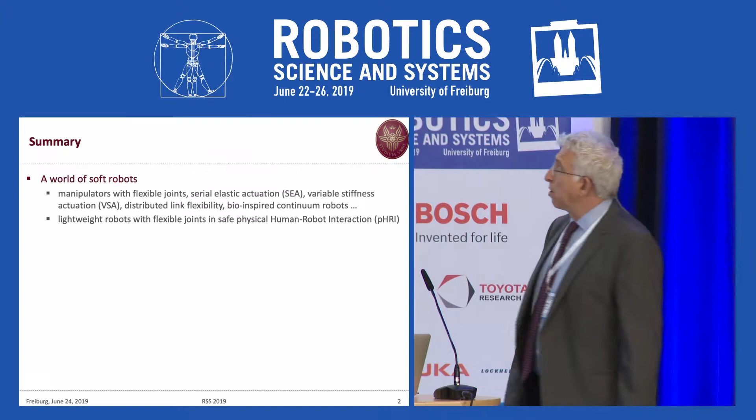So, control of soft joint robots with some application to safe physical human-robot interaction. So the outline of my talk will be just discussing what are the classes of soft robots that are around. There are many names. Sometimes things are equivalent, sometimes they are different structurally from the control point of view. I will show why we have used and we are using lightweight robots with flexible joints to do the best that we can for physical human-robot interaction.

And then I will present some easy modeling stuff on a particular class of soft robots, those that have flexibility concentrated in the joints or in the transmission. And for this class, I will just outline what is the classic theory of control for solving the conventional task that every robot should do, namely going to a certain configuration, so a regulation task under gravity or without gravity, or following a trajectory defined in the Cartesian, in the task, in the joint space, whatever. So, and for doing this, I will use the classical tools.

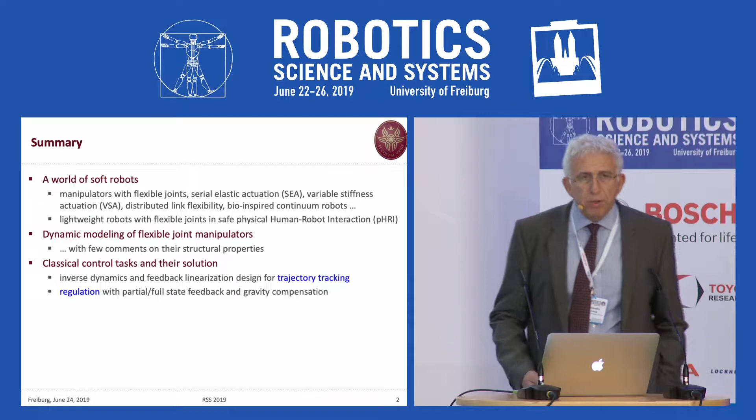Why I'm introducing this? Because the second part of the talk will be revisiting all these things for the whole class of soft robots, including also those with joint elasticity. So we notice that there is a kind of a contradiction in how we have handled for years, for decades, flexibility in these systems. And so there are new ideas coming on, and I will present my own ideas and also some of our colleagues going through, if time allows, 4 examples of this type of new idea.

Which is essentially, I recollect it, although my colleagues don't call it like this, as the use of feedback equivalence. So it's an attempt of merging, for those of you who are familiar with this topic, a pure model-based feedback linearization technique, like the one that we have heard before, so transformation through feedback of the dynamics of the system until we get a very nice controllable linear system that we can handle very easily.

So this was one avenue. The other avenue said, no, you have to deal with the dynamics of the physical system. You have to exploit passivity. In this way, you're robust. You are no longer affected by uncertainty in your model, which is not true even for the passivity case. So there were these two schools that fight for decades.

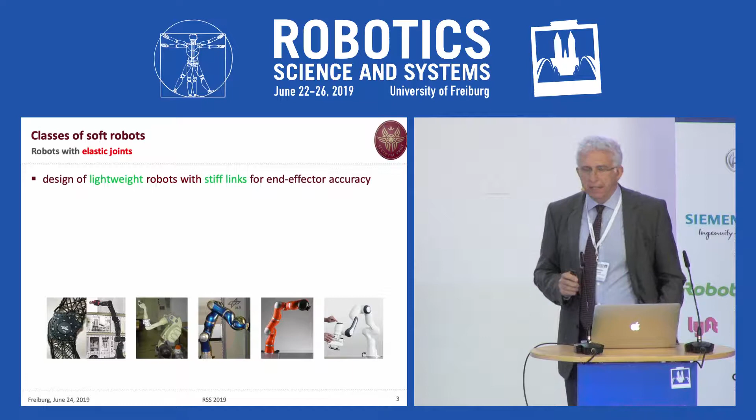First of all, robots with elastic joints, not flexible, elastic, because we assume that flexibility is in the linear domain. Why do we build this? In fact, sometimes we don't build this on purpose. We have to deal with the presence of flexibility in the transmission because we are using high gear ratio devices like harmonic drives, which introduce elasticity per se.

And this is a way of absorbing energy. In fact, no matter where you put some compliance in your structure, on the coverage of your links or in the transmission or on both sides, then you're allowed, for instance, to absorb impact, so to absorb energy.

In fact, in the case of elasticity at the joints, what you do is you decouple the inertia of the motors from the inertia of the links. So if you're able to build a system which has stiff links and joint elasticity, but lightweight link, then the heavier motors are detached from any effect of collision. So the robot will harm less whatever it hits, in particular humans around.

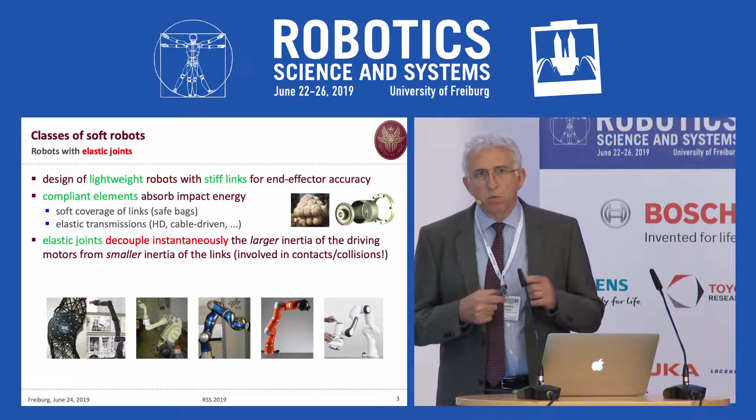And this was a main idea, probably the first idea for recovering the use of lightweight robots with joint elasticity in physical human-robot interaction. And of course, things do not come for free, so you have a more complex control problem. You need more sensors.

For instance, you may need a joint torque sensor or double the number of encoders at the joint, so one on the motor side, one on the link side, and so on.

But all these ideas have gathered into industrial products eventually by Kuka and by Franka Emika and so on, which are the so-called torque-controlled robots. Why are they torque-controlled? Because there is an internal loop which measures the transmitted torque across the elastic joints and then uses it for realizing the task independently of the presence of friction, and so on.

So there's another class that has been exploited, in particular also by Antonio very much in a European project, which is robots with variable stiffness actuation. In this class, you have for each joint, which is essentially flexible, but the flexibility can be modified online. So there's a second command, either in an agonistic-antagonistic mode or in a serial mode, that allows you to modify the actual stiffness of the joint, together with the fact that the joint moves and follows some trajectory.

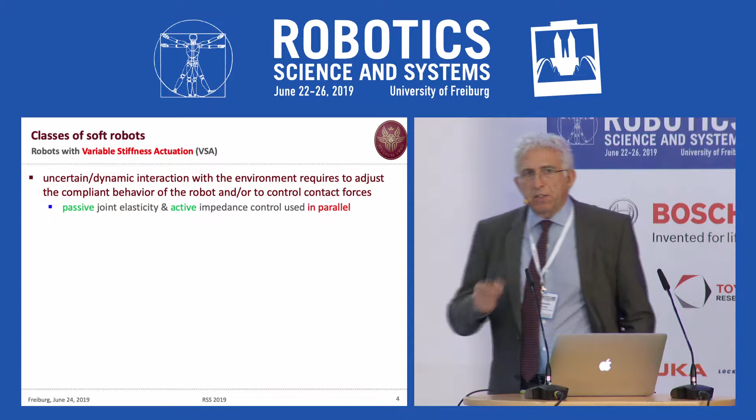So you have a two-output control problem that you can adapt online. So why is this situation good? Well, essentially because you're able in this way to preserve performance and handle safety. So if you have a very sloppy, soft robot, and it's light, you expect not to have many problems when it hits the environment, or in particular the human which is working nearby.

Okay, but the price you pay is that you're not as accurate as traditional industrial stiff robots are. So the idea of variable stiffness actuation is to modify it online to get performance when you need performance. For instance, when you're starting and you want to accelerate very fast, you need to stiffen your joints and then relax the compliance of the joints when you're reaching high velocity, where the danger of doing some damage to the environment or to the human is higher.

So there are other reasons why you can use variable stiffness actuation, and lately there have been also many other applications. The idea of storing energy and relaxing it in an impulsive way, so that you can throw a ball 10 times longer than with a conventional actuation with the same amount of power, and things like that, and robustness to environment problems.

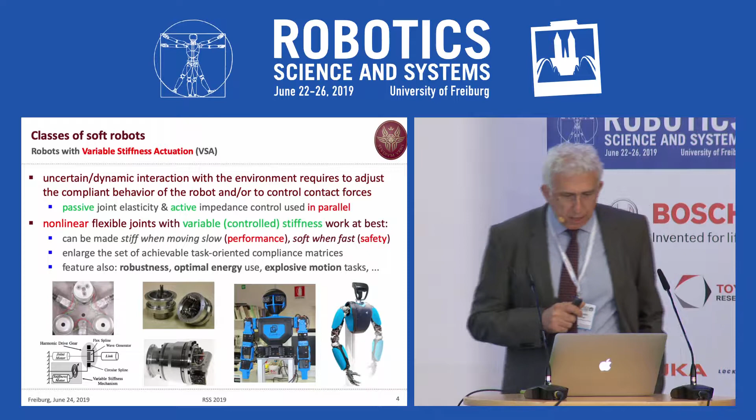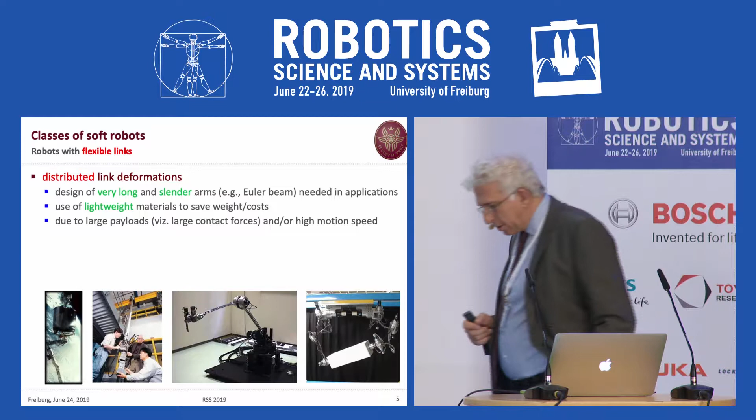Okay, so this is another thing. Then there's another class of soft robots, those in which flexibility is distributed along the links. Again, this is not really a choice in general. If you're familiar with the Space Shuttle manipulator system, this was a very long arm in space, so not subject to gravity, but needed to be teleoperated quite slowly, because otherwise, with its length and with its limited mass, but still quite heavy, it was going to oscillate and vibrate, and this is not good.

So you want to use lightweight material to save energy and cost, or you may have this situation of flexibility distributed along a link appearing in your operation because you're carrying heavy loads, and this is another situation. The situation is quite similar because in the presence of link flexibility distributed along the various limbs, then you will lose accuracy in position.

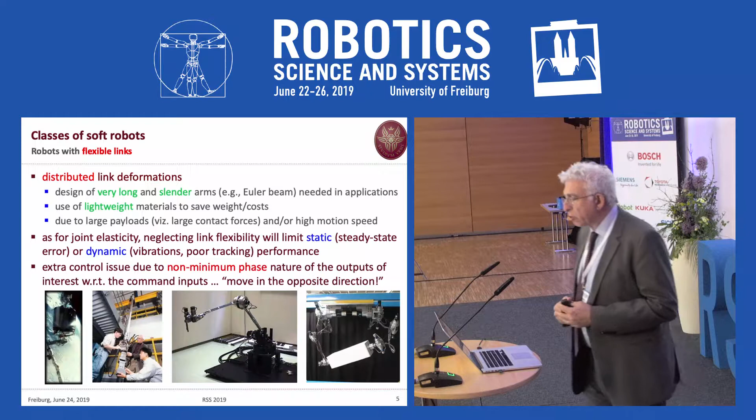So you have a static deflection due to gravity. But also, when you're doing a fast trajectory, you will tend to oscillate. So you have a control problem, just like in the case of joint elasticity and of variable stiffness actuation as well. Here there's another problem, however.

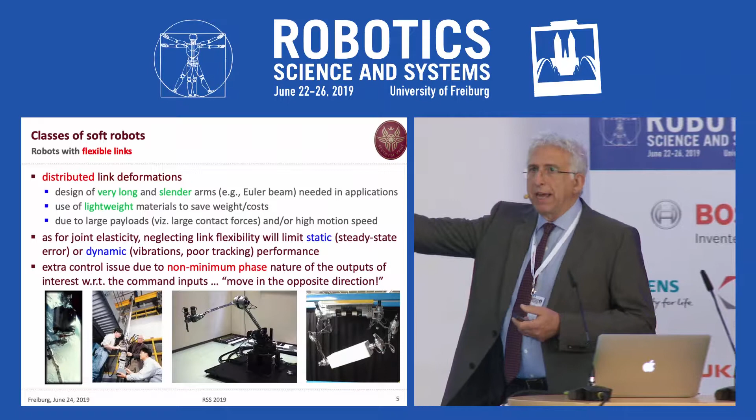The fact that from the control point of view, you have a sort of non-collocation of what you'd like to control and where you apply your command inputs. Typically, if you think of a long, slender, flexible link, like my arm, you apply torque at the base, but you want to control the tip motion.

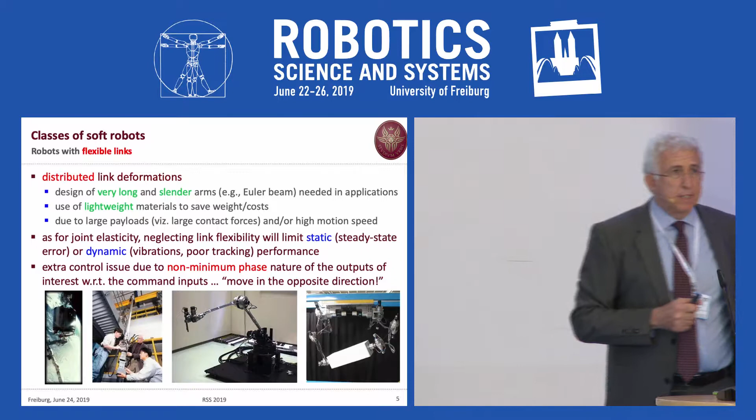And for those who are familiar with control theory, the linear transfer function that you can build upon is a non-minimum phase one. So it has zeros which have positive real parts. So you cannot do inverse dynamics in the conventional sense, because otherwise these zeros will become poles in the controller which are unstable, and you will have instability in the closed loop.

So this is an additional phenomenon that you can represent by saying these systems move in the opposite direction with respect to the command. So if you're giving a torque at the base, the acceleration at the tip will typically be in the opposite direction. And this is revealing the fact that the system is non-minimum phase.

Finally, continuum soft robots. I think this is a big, growing community. You are familiar with the fact that Soft Robotics as a journal has the highest impact factor in the field, which is, for me, kind of surprising, but not too much. Many of these systems are represented by an infinite number of degrees of freedom in principle, or they are hyper-redundant in terms of degrees of freedom.

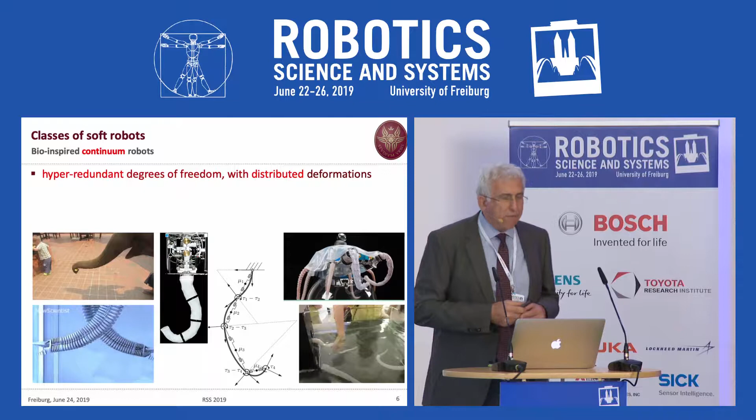And they have, again, distributed deformation. Here you can see a number of examples. One is biological, the other are bio-inspired. So this is another common technique. You see the famous octopus by Scuola Sant'Anna, and the elephant trunk by Ian Walker, one of the first to start this type of activity.

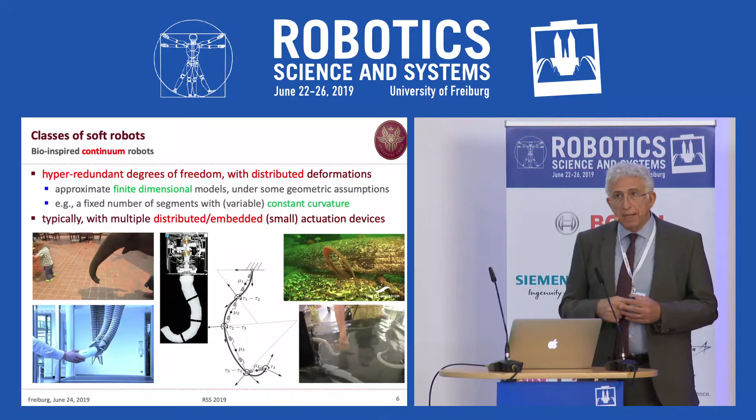And you have also an equivalent representation of this distributed flexibility in a continuum, where under certain assumptions, you can match this with a finite dimensional model.

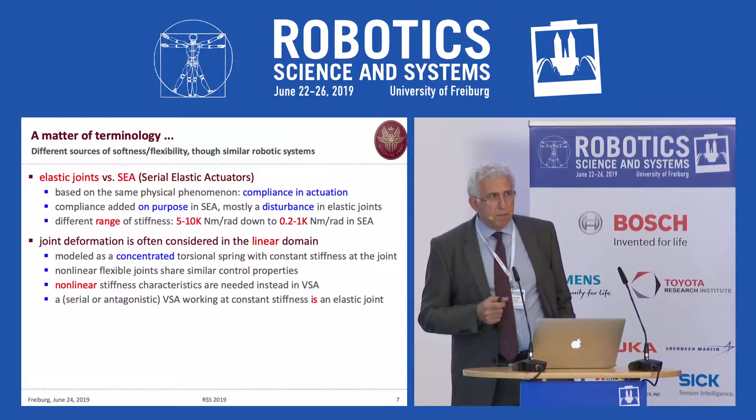So this is one comment. The second comment is that most of the time we consider flexibility in the linear domain, so we talk about elasticity, but many problems and many similar results hold also when you're dealing with nonlinear stiffness behavior.

And finally, as Antonio commented, this is, I think, a very interesting point. If you talk to control people, they say, okay, all those flexible systems of robots are under-actuated systems. Why? Because the number of generalized coordinates or degrees of freedom of the system is larger than the number of commands. So you cannot do whatever you wish, like in the case of a rigid robot. So trajectories should be feasible according to the model and things like that.

But this is not the whole story, because if you think about a simple mechanical system made by a number of masses connected by springs, with just one input on one side, and you're controlling the last mass in this series, well, it's not easy, but this is a linear controllable system, and you can do many things. So under-actuation is not the whole story, but under-actuation without the property of controllability in the first approximation, then the problem becomes very hard.

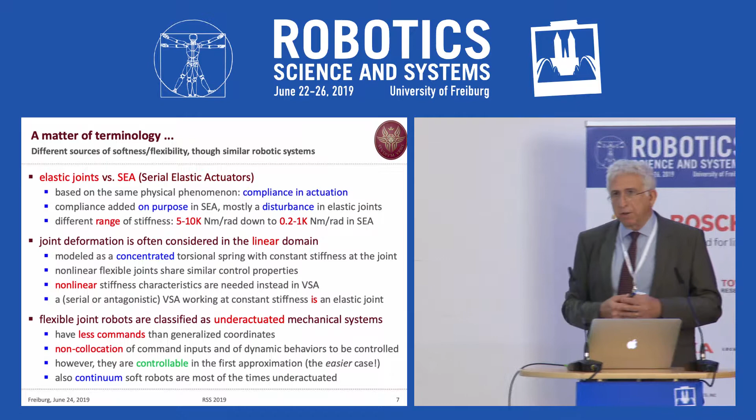And elasticity, at least in the joint elastic case, provides this linear controllability, and this is why also more complex nonlinear control design can be implemented.

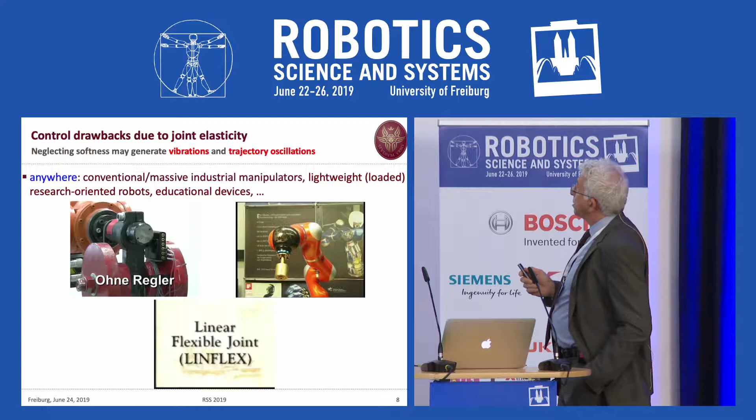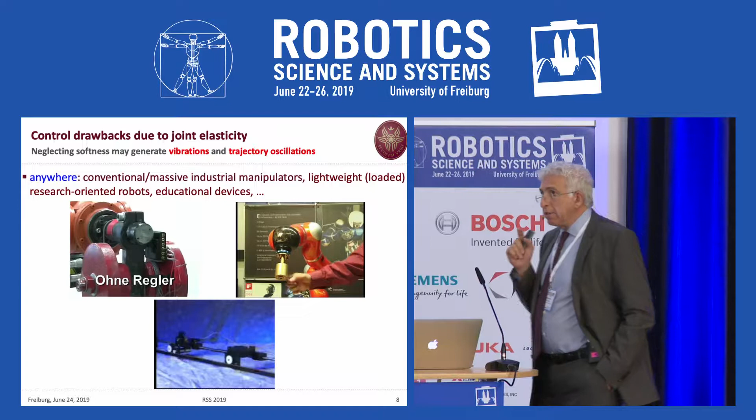In this video, I try to show the classical problem that you have in the presence of joint elasticity. You can see an industrial robot, a heavy one, a KUKA, and also the lightweight KUKA arm, actually the DLR, and then also an academic example by Quanser. In all these cases, on one side you have the motor, which is being held fixed or oscillating at a given frequency in the last case, and on the other side the link side of the elasticity, which vibrates because it's not controlled unless you model what is going on. When you model it, you can counteract with feed-forward or feedback strategies. This is just an introduction.

This is one, or only two videos in my lab, where we were using the lightweight KUKA arm to do physical human-robot interaction. We can do this in a very efficient way because we have a good model, and because of the presence of joint elasticity, which is able to decouple the effect between the links dynamics and the motor dynamics.

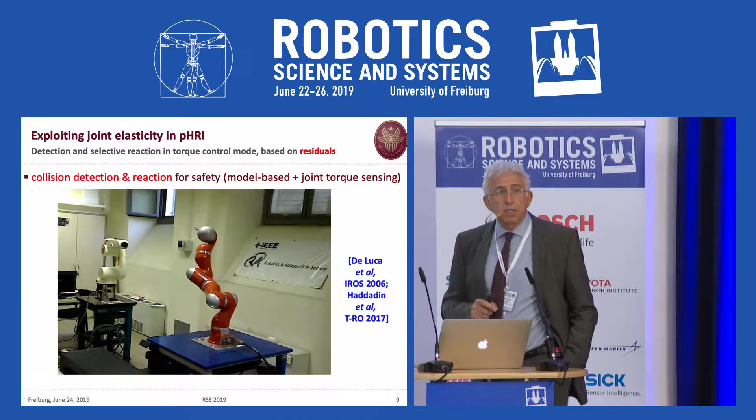In this case, without having a force-torque sensor and using the so-called residual, for those of you who know this type of work, we are able to detect collision at any place in the structure and also distinguish if it's a soft or a hard collision. If it's a hard collision, like in the first place, then the robot goes away. If it's soft, it engages a collaboration phase where forces are exchanged, and in fact they are measured and controlled. Here I show an ICRA 2015 result.

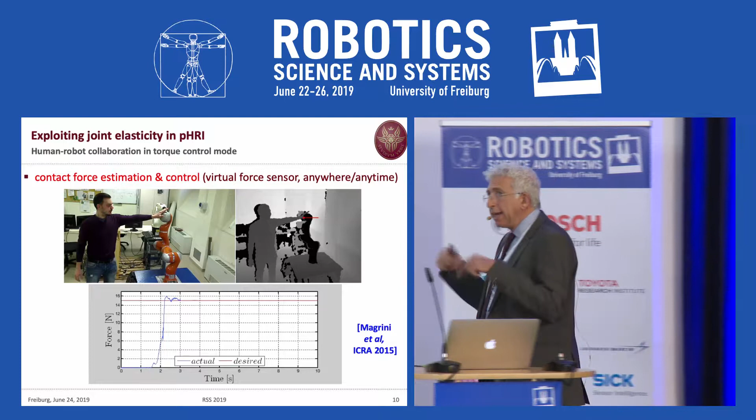Again, you can see a depth view of the robot, and also a red line, which is where we detect the contact based on external measurement, one or two Kinects, and internal model-based computation, which is the residual signal. When both of them tell us that something is going on, we localize the contact point.

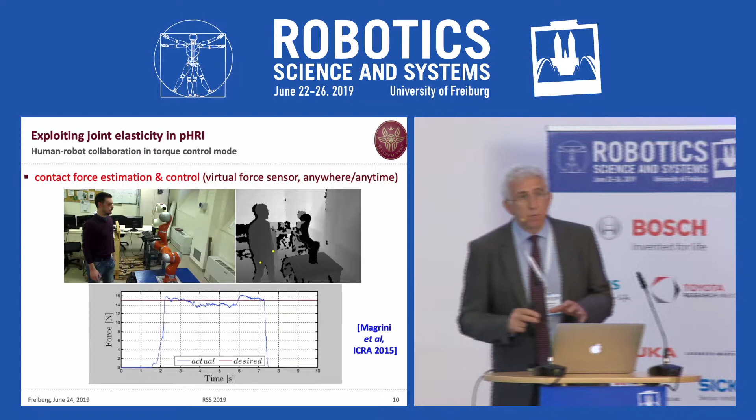We have an estimate of the resulting joint torque from the applied force by the human, and so we can estimate also the intensity and direction of the contact force. Once we have this estimation without a force-torque sensor, we can regulate this force, for instance here at 15 newtons. We can do impedance control, a hybrid force velocity control, but at the contact point, not at the end effector or at the joint space like it's traditional when you have a joint torque sensor or force torque sensor at the end effector.

This is just one other motivation why we need to study this type of dynamic system. I will start with this equation, which is quite fundamental. You don't have to go through it, but just look at the assumptions we made: small displacement at the joints, the fact that the motors are axis balanced, and one important thing, we neglect inertial coupling. This is a so-called reduced model introduced by Mark Spong in 1986.

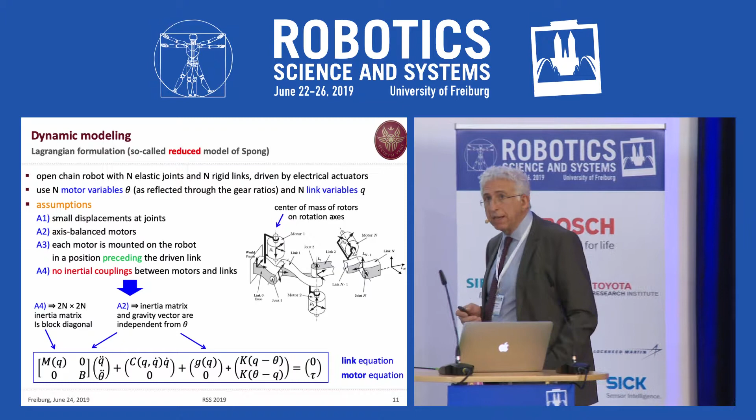This is quite at the time of my PhD thesis. You can see the upper part of the dynamics, which is called the link equation, exactly the dynamics of a rigid link robot, but without input torque, just with elastic torques, which is this product of K times q minus theta. Q and theta are the variables of link and motor position, which drive through flexibility the link dynamics. Then you have a very simple motor dynamics, which is in most cases linear. The B matrix is the inertia of the motors, typically diagonal, so you have a linear addition to the system. On the right-hand side you have the input torque. So this is the classical model.

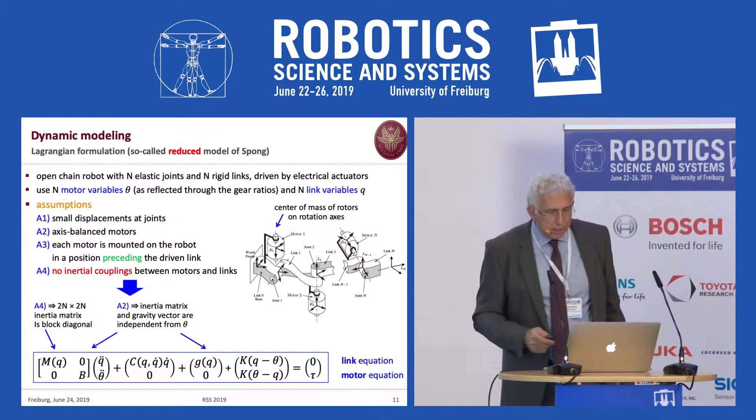Now, if you look at a single degree of freedom, a linear version of this, given by an inertia or mass B, which represents the motor, a spring K, a mass m, which represents the link, you're acting on one side but would like to control the position of the other side, and react to environment forces applied to the link side of the problem. This is a paradigmatic version of the multidimensional nonlinear case.

In this case, you can work with linear transfer function, and you can recognize that if you're matching the input torque to the position of the motor, then the system can be shown to be passive. In fact, it has zero and a relative degree 2, for those familiar with this subject. But if you look at the same system and try to reach the position of the link, you have a strange phenomenon: the zeros disappear. The relative degree, which is the difference between the degree of the denominator and numerator of this transfer function, grows to its maximum, which is 4.

This is, in fact, unveiling the fact that when you move to the nonlinear case, the system will be feedback linearizable. Okay, so I think I will skip this.

You can recognize the presence of joint elasticity by looking at standard frequency response, like Bode plots, but this is not important now. So with this model, with the general model, you would like to do tracking. Follow a smooth trajectory, smooth enough trajectory, and apply some torques that realize this.

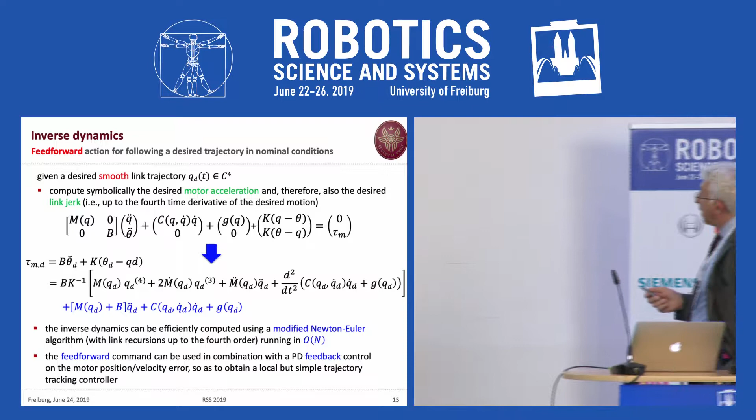So you can do this, and you don't have problem of instability or else. But if you want to apply the same type of idea, starting from a different state, so not being matched initially with the desired trajectory, you need to use also feedback.

And in particular, you can use feedback in a very general way, so by using a nonlinear law in terms of the measured state.

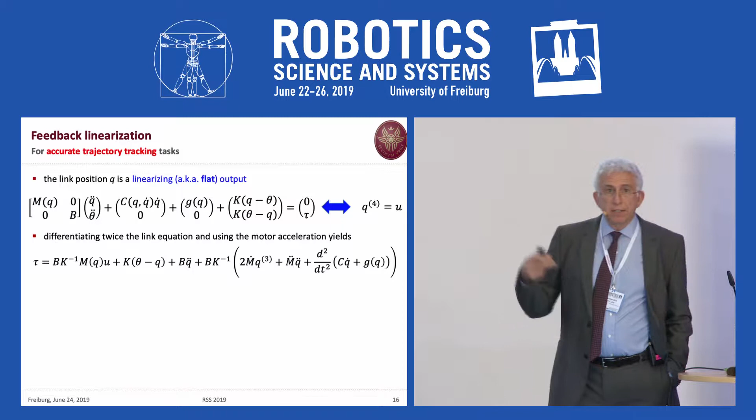And the way in which you derive this, you don't need to know the theory of Lie brackets and the involutivity and so on. You can proceed for this second-order mechanical system just by looking at the equation and taking as many derivatives as needed until you find the input explicitly appearing, and then you try to invert the system. So this is the main idea.

In fact, if you take two derivatives of the link equation, which has a 0 on the left-hand side, so there's no input torque there, and then you substitute, you can achieve a behavior which is similar to the computed torque in the rigid case.

The only difference is that you don't have the acceleration being controlled by the new input u, but you have the fourth derivative of the joint position. So you're controlling, in fact, the snap directly.

So this has been criticized quite a lot because apart from the many computations that you have to do, but doing computation nowadays is not really a problem, okay? So I don't accept any comment on that any longer.

So, but the other critique was you need higher derivatives of Q, and who gives, there's no sensor measuring joint acceleration, even less joint jerk.

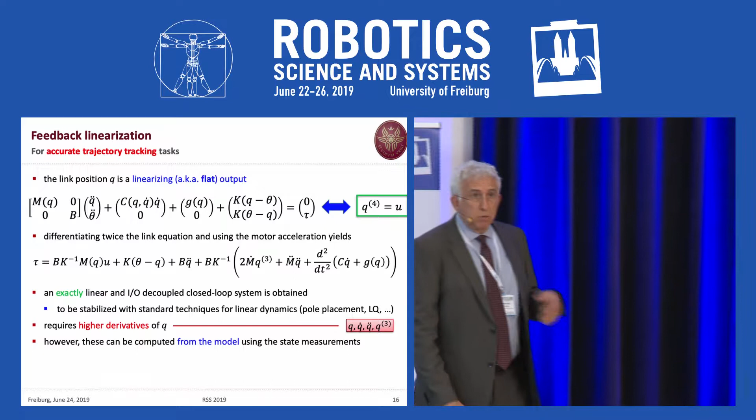But these, in fact, are not needed. You don't need to measure this. You just measure the position of the motor and of the link. If you want, you do numerical derivative in order to get the velocity, and that's the whole state information you need to implement this control law.

And in fact, if you're scared about all these terms, you can have at your disposition also a numerical method to compute this feedback linearization control. So a package which works wherever the robot is, no matter how many joints. Unfortunately, it grows with n cubed. The complexity is not linear like in the standard case, but the coefficient in front of the cubic terms is very small.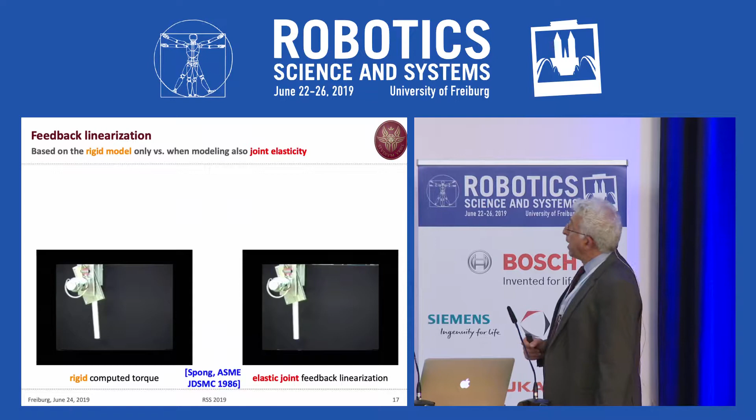Okay, so with this technique, you have had, this is a seminal result. I found this video in the Springer Handbook of Robotics. So Mark Spong implemented first this feedback linearization, but first thing, he tried to implement it assuming that this experimental device was rigid.

Okay, and this is what happens, because you're feeding back not the motor position, but you're feeding back the link position, and because of this fourth order linkage, the closed loop becomes unstable. This is very surprising, in fact.

Instead, if you're doing things in the right way, so you're implementing the full feedback linearization control, you have a perfect tracking of this smooth trajectory and then going back.

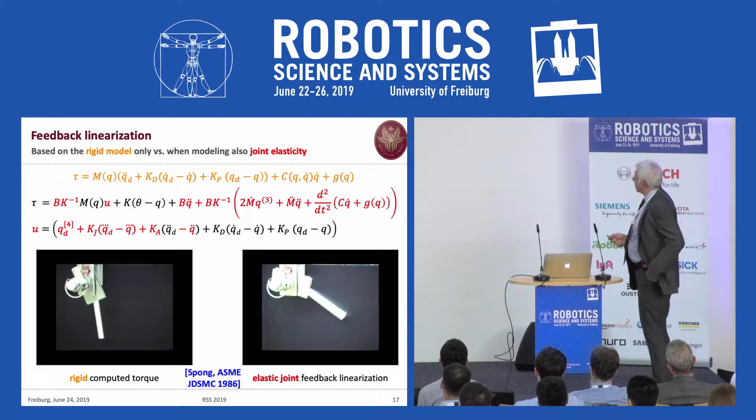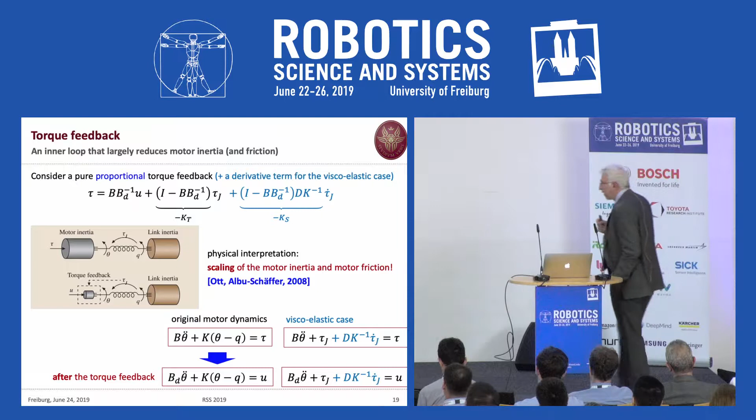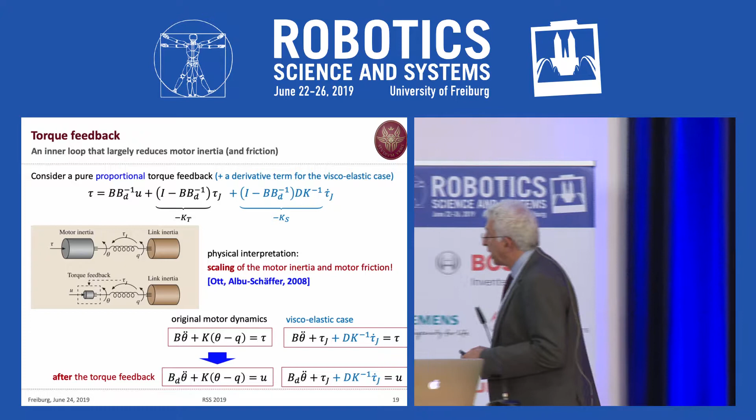For instance, if you have available a joint torque sensor, you can use it, and this is not really for feedback linearization, but for doing something very interesting: reducing the motor inertia. As I said, if you have a lightweight robot, the link inertia is small, but the motor inertia continues to be dominant. With this type of feedback, you can reduce at will the motor inertia so that the system becomes more and more close to the rigid case. This is an interesting result by Christian Ott and Alin Albu-Schäffer.

Now, this is about tracking control. What about regulation? Typically, when you want to solve a regulation problem, you have a simpler control law, and in fact, this is the case here.

Here I've listed a number of results that have been growing over the years from a colleague of mine, Patrizio Tomei, in 1991, who proved that a PD controller plus constant compensation of gravity at the destination is globally asymptotically stabilizing the closed-loop system, provided that the gain Kp of the proportional is large enough. In fact, it has to dominate this quantity, which is the bound on the norm of the gradient of the gravity terms, and also the stiffness is large enough.

Over the years with colleagues and also with the group of DLR, we have been working on relaxing this condition. The last known result published in a journal was that if you do some kind of iterative update of the gravity term in the control law based only on motor position measurement, and you have a kind of contraction, then you can relax the condition on the proportional gain. It can be just positive, like in the rigid case, but you still need the stiffness of the joint to be larger than alpha, which dominates the gradient of the gravity.

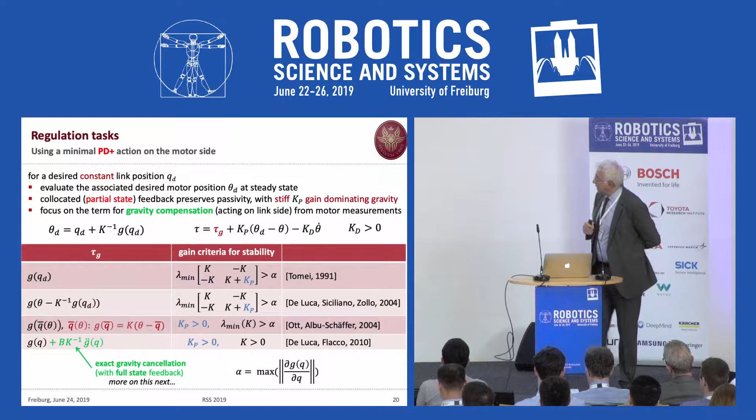If you don't want to do that, then you can apply exact gravity cancellation, which requires, however, full state feedback. This introduces my last part: the idea of using feedback equivalence in order to obtain the least possible modification of your system which fits to your need. This is the take-home message, in a sense. You don't need to cancel everything. You cancel only what you think is important to cancel, and you use as much as possible the physical properties of the system to preserve them where they are needed.

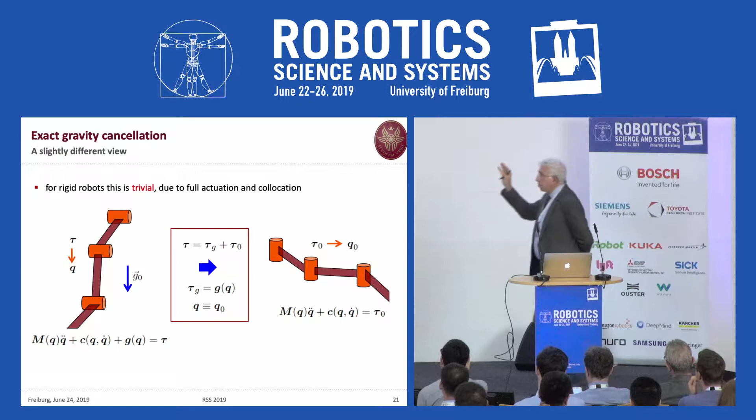So the problem is exact gravity cancellation. This is really not a problem for the rigid case, because you have full actuation, so you have the model on the left-hand side, and there's no need of a robotics course to say that if you design tau by cancelling this G of Q and then adding whatever tau 0 for doing the rest of your task, you have exactly cancelled the gravity. So you like your robot, whatever dynamic it has, instead of moving under gravity, to behave like it's in a horizontal plane, okay? This is possible, of course, and trivial in a sense.

But when you have joint elasticity, the problem is not so trivial. How do you compute this tau g, the term that removes gravity from the picture? Why is there a problem? It's quite evident because of non-collocation. The torque is here, but the gravity is there, so you have to go through the elasticity in order to reach this upper equation and cancel out this gravity.

So how do you do this? In fact, before doing this, the same problem occurs if you're having variable stiffness actuation. The equation looks very similar. The only difference is that you have two motor equations for each joint, and this is the vector format for a generic set of n joints with variable stiffness actuation.

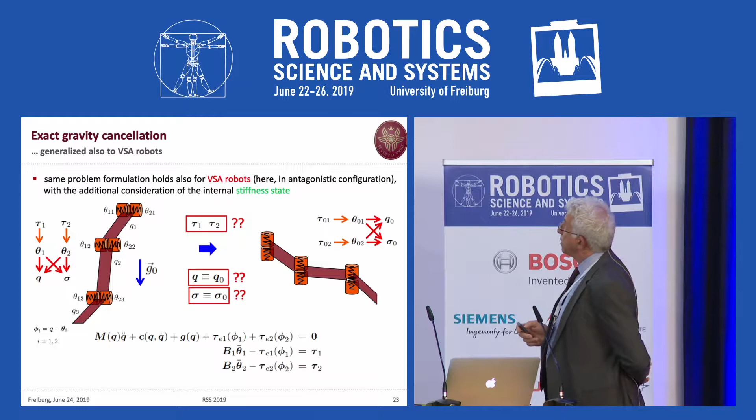Same problem: is it possible to find input torques on the robot under gravity so that the robot behaves itself like the same robot without gravity? The question is exactly the same.

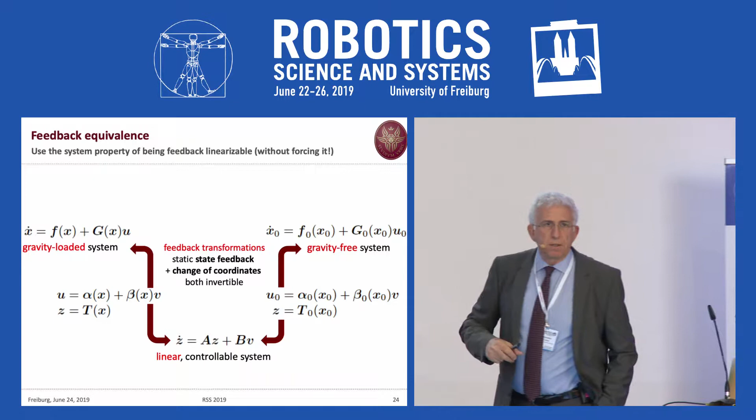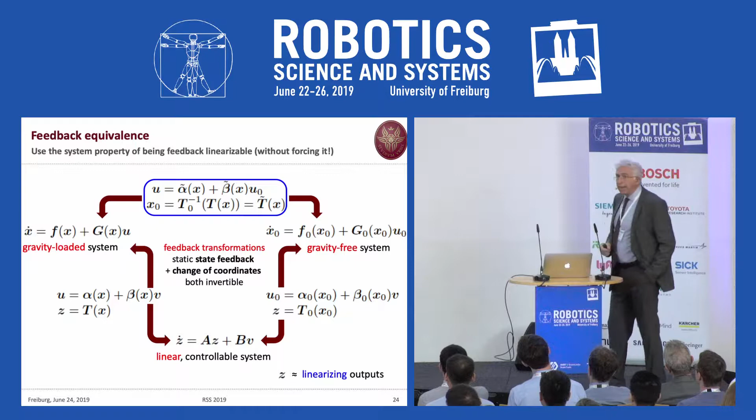The solution goes through a very simple argument. Suppose you have a nonlinear system, in this case gravity loaded—it could be anything, it's your starting system. But you know that through a nonlinear feedback and a change of coordinates, you can transform this into a linear controllable form. Then you check if your target system, the gravity-free system, is transformable into the same form. By simple composition, you move directly from one to the other. So the existence of this feedback linearization property allows you to do something simpler if needed. It's a very simple concept.

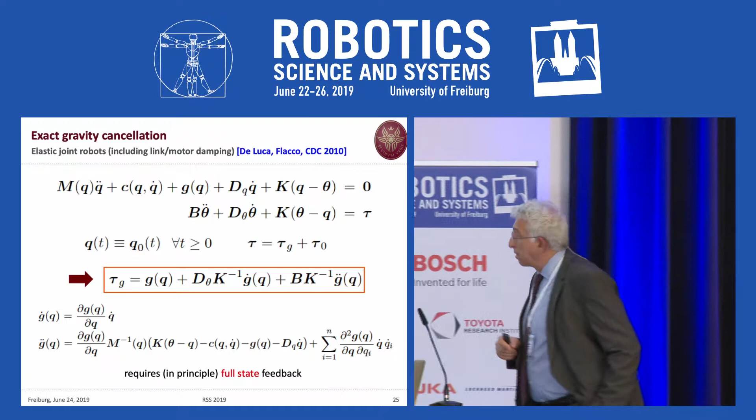If you apply this to our case, the result of this equivalence is that you cancel gravity g(q), but you also have to cancel the first and second derivatives of the gravity vector field, multiplied by the inverse of the stiffness gain. When k goes to infinity, you recover the standard case of rigid joints. I'll skip this.

Once you've done this, you're left with a system that has no gravity any longer. So if there's no gravity, a simple PD could solve the regulation problem without any extra condition, and this is true. The only thing you have to make sure is that you do the change of coordinates needed to have the same correspondence.

You may imagine that my robot with flexible joints moving in a vertical field behaves exactly like this, but this is true only from the outside, only from the link side. In fact, the motors inside are going to different trajectories needed to compensate for the true gravity present. If you leave a robot at rest, the position of the motor and the position of the link are the same. But under gravity, even if the link positions are the same, the motor should be charged to compensate for the gravity.

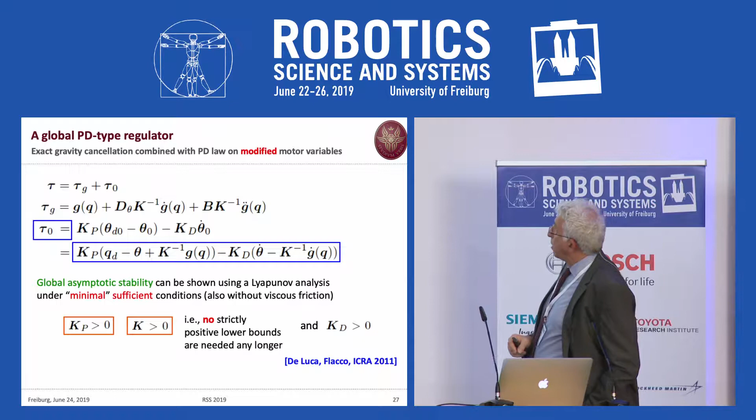So there's an equivalence only in terms of a selected set of variables, the link variables. With this controller, you can prove global asymptotic stability under no special condition, neither on the proportional gain of the controller nor on the stiffness. This is very valuable also for the variable stiffness case, because you may wish to bring the stiffness of the variable actuation joint to a very low level, even below the presence of gravity.

In this case you have two so-called linearizing outputs. Remember, you have one joint but two input commands, two torques from two motors working in agonistic-antagonistic mode. So you have two sets of linearizing coordinates. What are these coordinates? Just like in the constant elasticity case, one is the position of the link, the other is the actual stiffness of the joint. So you have two outputs to be controlled.

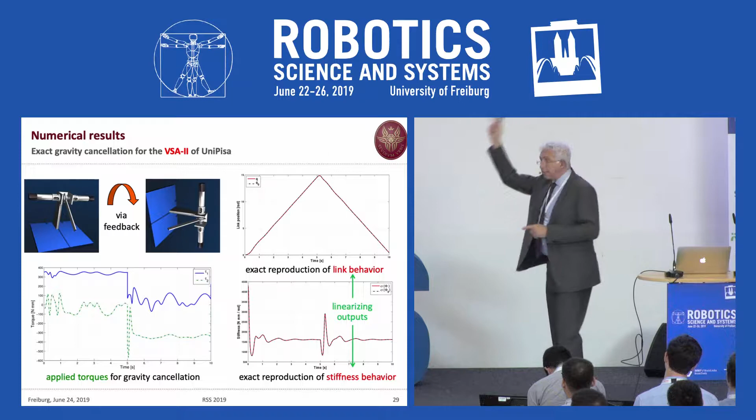What you can do is let the robot behave as if it was on a horizontal plane instead of moving in a vertical plane. This output function reproduces exactly the one of the unloaded system, but internally, of course, the two motors are acting wildly in order to compensate for the presence of gravity.

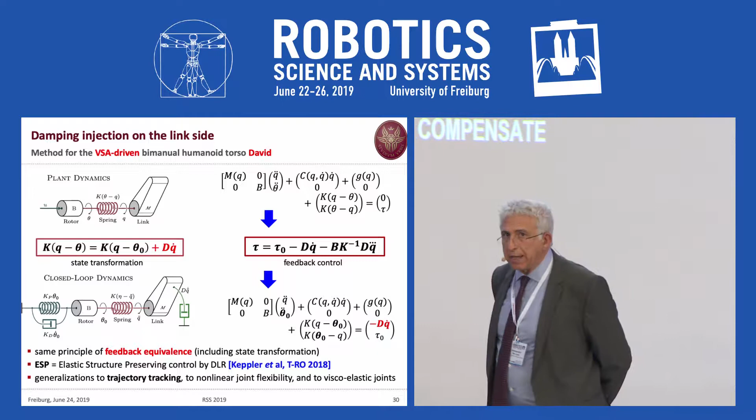This idea of canceling some remote term in the dynamic equation was later used—much later, in work from 2017 and 2018—by the group at DLR, very good friends of ours, to solve a problem they had with their variable stiffness upper torso. This device has changed name over the years; now it's called David, it used to be called HASy. I don't know why they keep changing things, but anyway.

They experienced that there was no way—they tried to do feedback linearization, but it was too complex, too many uncertainties. So they asked: how can we stop the link vibrating so much when we're doing our task? They had this problem.

So they said, okay, instead of canceling gravity, we should add a damping term on the link side. Instead of taking out, putting in. Very simple idea. The original model on top has no damping on the link side. Now the target model is the same, but with an additional viscous damping term.

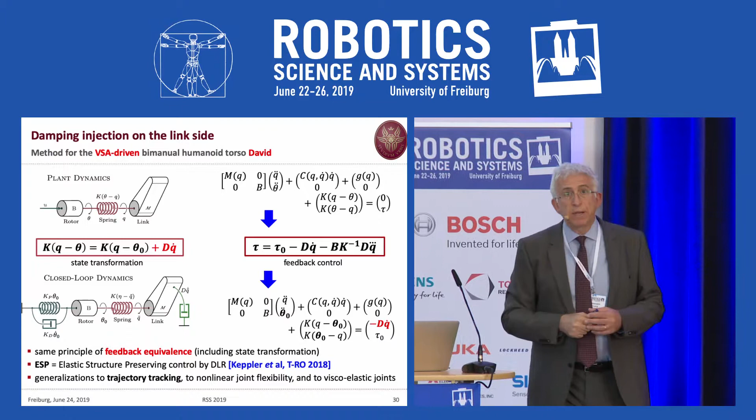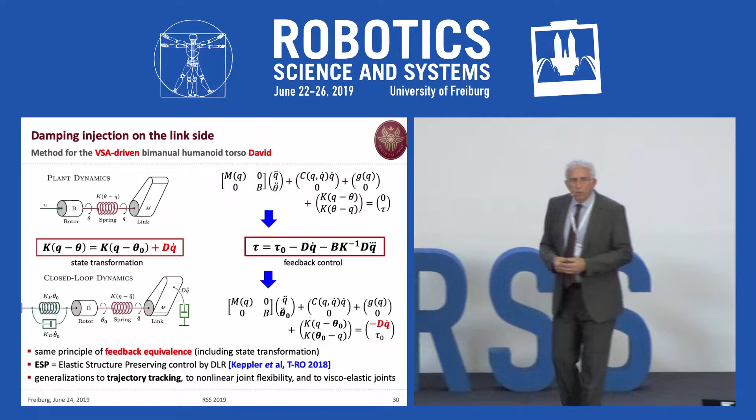And now you can design your control. If the feedback control is the one, it's much simpler than feedback linearization. Even if you have uncertainty in the parameters, what will happen is that you're not really damping with the desired value of d, the motion of the link, but you're still damping.

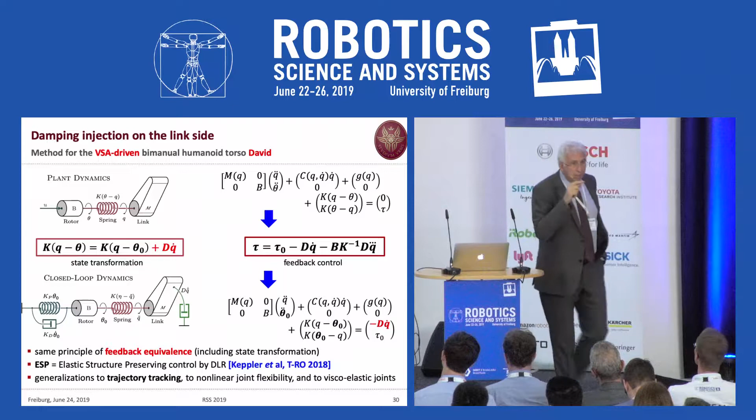I mean, you have to have a very large perturbation in order not to achieve damping under uncertain conditions. So this idea is, again, an application of feedback equivalence, although they have called it elastic structure preserving control. Together with the feedback control, you have also the state transformation, which maps, in particular, the theta variable, the motor variable of the system without link damping, and theta 0, the motor variable of the system which realizes introduction of damping on the link side. So there's still the same concept of state transformation plus nonlinear feedback in order to achieve the result.

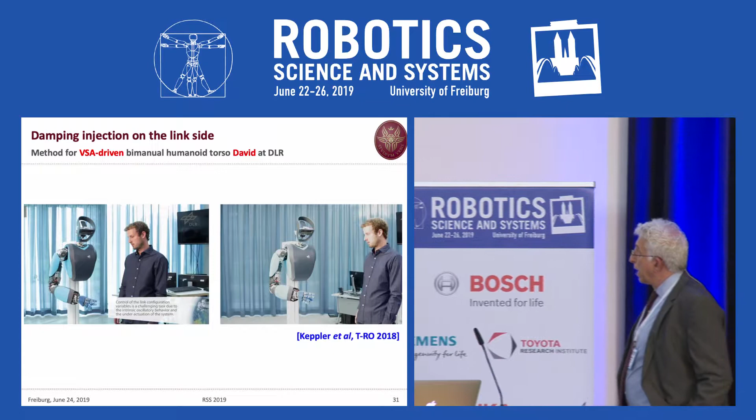And here I have a video kindly offered by DLR. You can see on this side the situation in response to a force and the vibration that they have without this damping. And on this side, you have the same situation. You can move the system very far out from the rest position, and you don't see oscillation. The system is nicely damped.

So what about the fact that you really can interact with the environment? This is a third example, and I think I'm almost done with this. So the idea is, okay, let's represent this on a simple 1 degree of freedom case.

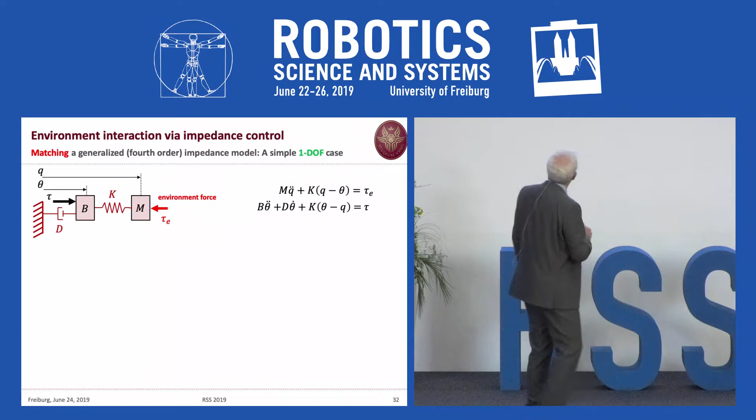So we have the elastic joints. Now the additional part is the presence of the environment force here. Now if you try to invert the system, you will end up needing not only the measure of this external force, but also information about its first and second time derivative. So it's impossible to have, or very noisy if you wish. So this is not the good idea.

So the good idea is to have a target model which is exactly like the one that you're starting with, but with different parameters. If you are familiar with the behavior of second-order mechanical systems, mass spring dampers, you know that by changing those parameters you know everything about the system: step response, overshooting, time to reach a steady state value, and so on. So you can choose your target model.

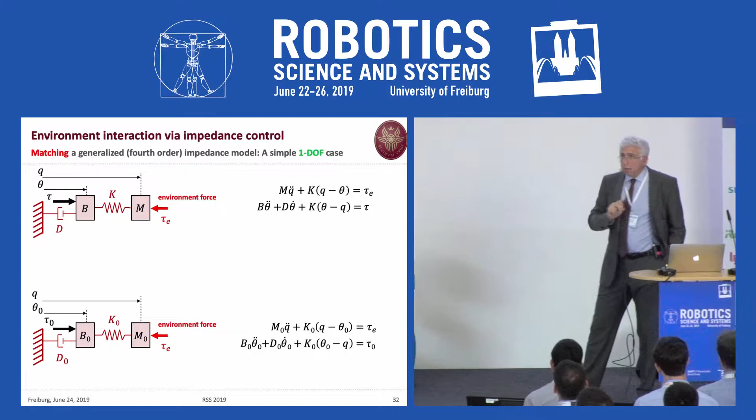Now, there's nobody, so far - we are working on that nowadays - that tells you what is the best reference model of the fourth order, which is the one you are targeting in this case. Now, we realize we need to make a restriction, so we cannot change the mass of the link side. So the M0 of our target should be exactly the same as the one of the original system. But this is the control law that achieves the goal.

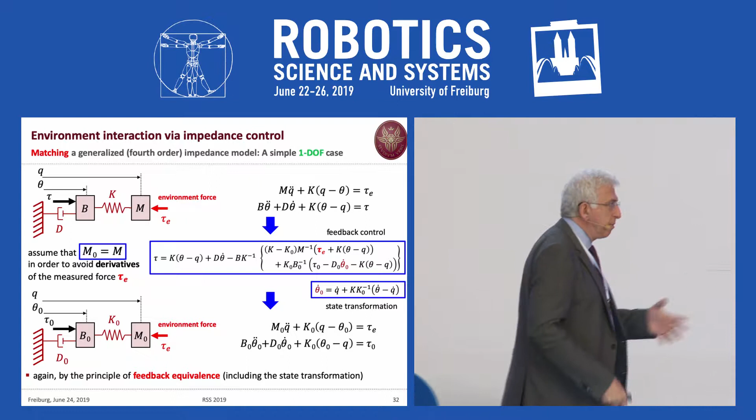There's a second problem that you can formulate, a problem of optimal control. So if your system is very bad and your target is very far away, you would like not to have exactly a matching, but you would like to minimize the effort in order to get as close as possible to the reference model. And this is a classical optimal control problem that you can actually solve in closed form. Okay, so this is a third application.

And the last one, which I added on purpose here - and I should thank Cosimo della Santina, because I was reviewer of his PhD thesis, and he's in a very good position to speak to the whole community doing soft robotics, and this is why I asked him if I could steal a couple of slides, of course reorganizing them in my way. So he was considering, among many other systems, robots with continuum deformation, continuum soft robots.

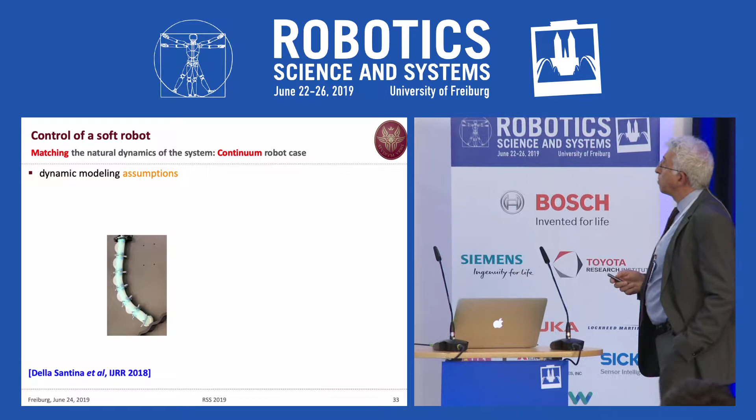Under some assumptions. First assumption is that this can be approximated by a finite number of segments, each of which has constant curvature, but this curvature can be changed by control. So this is the first hypothesis. In this case, you see the experimental device that he set up, and there are 4 coordinates, which are not joint coordinates. You can call them curvature space.

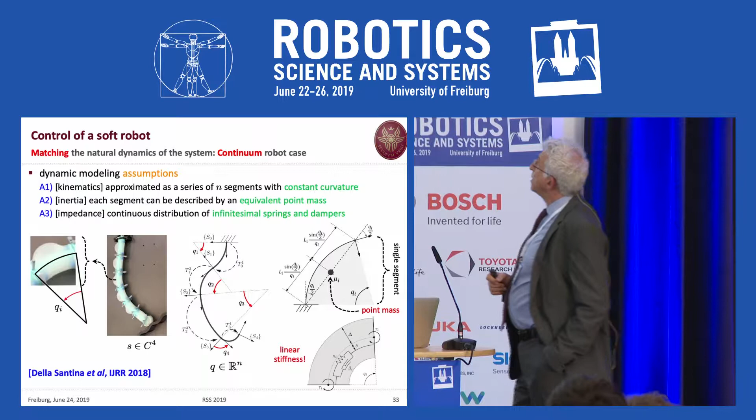And there are other assumptions, one on inertia, so you can represent the single segment by an equivalent point mass with a certain degrees of freedom. And finally, some infinitesimal distribution of stiffness and damping, which brings out this system to have a linear behavior in terms of elasticity.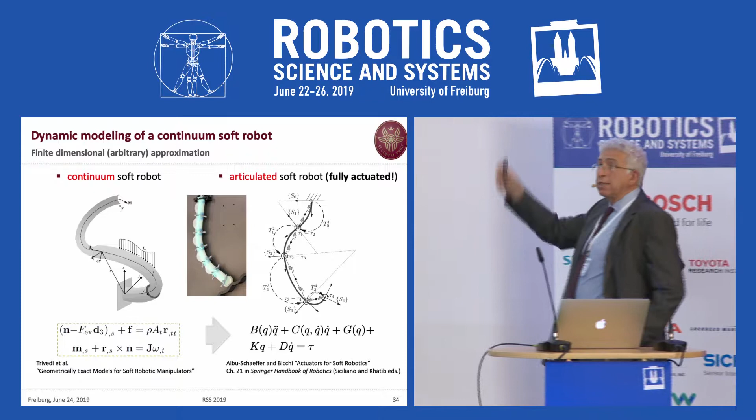Now, what was realized is to move from a continuum, infinite dimensional system that you can still model, of course, but it's very hard to use this model for control purposes, to an equivalent system which takes the same form as a rigid system plus these two terms, one related to the stiffness of the device and one to the damping of the physical device, which is this one, okay?

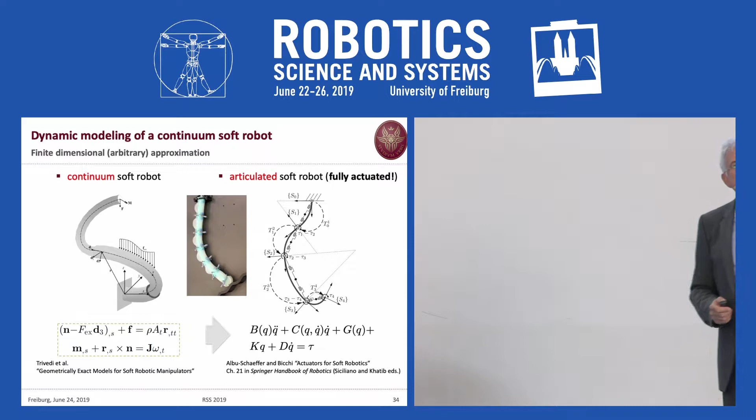Now, the nice thing is that this system, although being soft, by construction is fully actuated. So you can do many things. You can cancel everything and go home. But a good idea is to preserve the physical property of the system. Otherwise, why did you set up or build such a soft robot if you want to stiffen it? Okay, that would be completely crazy.

So, for instance, you can do the tracking case here. It means that you assign some time profile to the curvature of the single segment, and then you would like to have a control that even if you're starting with a different value, you have a transient, and then from some instant on, you track exactly that type of behavior. And this can be done in several ways.

First of all, as a subclass, you may have a regulation task. So in the regulation task, the reference is constant.

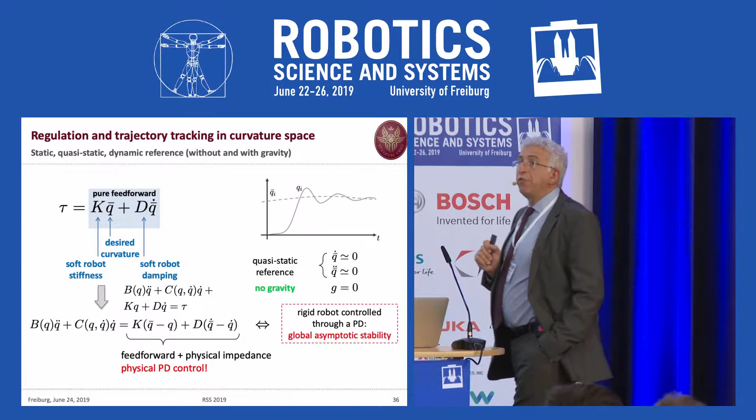And in this case, if you just do a feed-forward action, which is k, the soft robot stiffness, not a different value, times the desired curvature, plus the damping of the soft robot, times the derivative of this, and you plug this expression into the closed-loop system, then you realize that your system looks like this, and it's exactly a robot without gravity under the action of a PD.

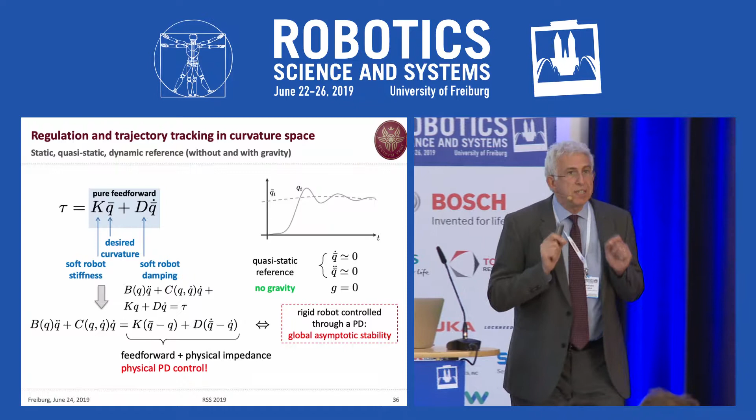Now, all students of a first course in control, robot control, should know that this is a globally asymptotically stabilizing law, but it is in fact a PD control which is physically motivated, because you're not using an arbitrary KP and KD, you're using exactly those of your system. So you need to model and identify this in the first place.

And of course, if there's gravity, you can cancel gravity because you have full actuation, there's no problem. If you had underactuation, then the same problem that I've shown you for the elastic joint case would apply.

And finally, if you want to follow a trajectory, you add more things. And in fact, the resulting aspect is a passivity-based control, not a fully feedback linearizing one.

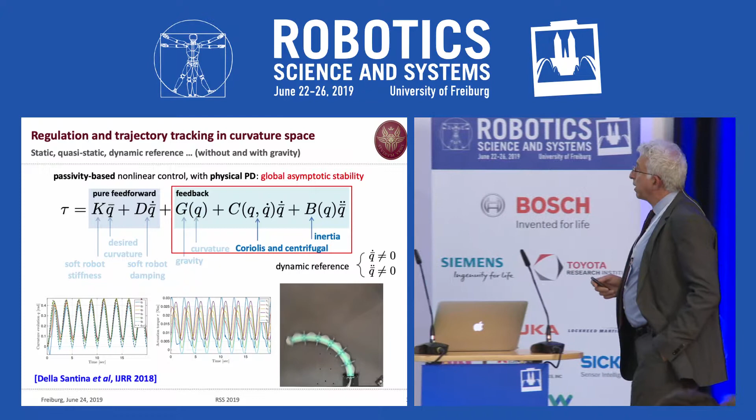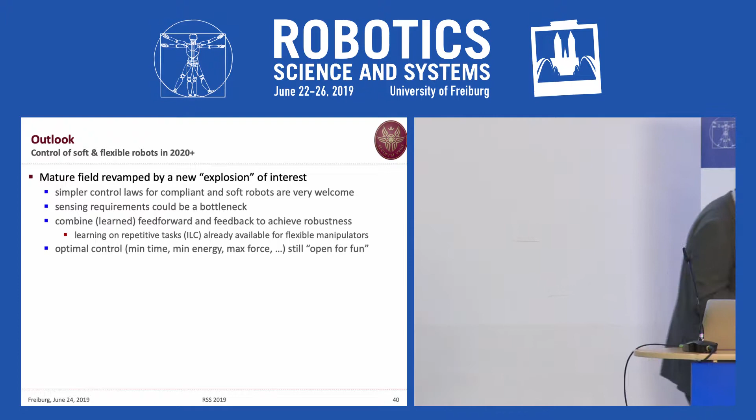Okay, I think that I will skip this and just take to the conclusion. So I think that this idea of soft robots in any form has now a lot of interesting ideas from the modeling point of view, from the application indeed, but also from the control point of view. Revamping old ideas and giving new juice to this concept.

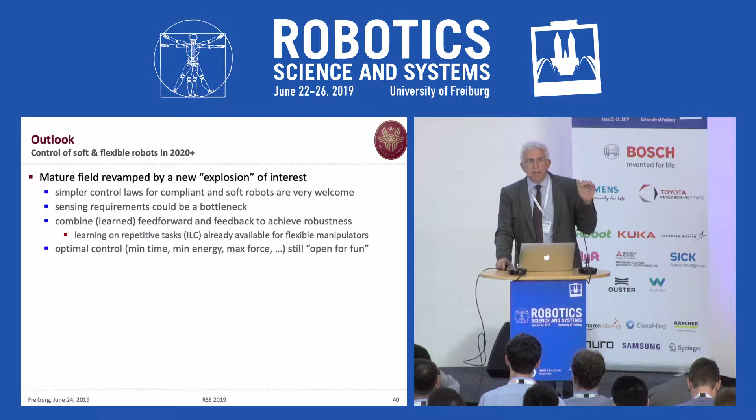So in fact, we are looking in any case for simpler control laws. Not because we are not able to implement complex control laws, but because of computational times. This is not a problem, as I said, but because of really identifying a very good model, and this is maybe difficult. The other problem is the bottleneck due to sensing. Of course, we need to sense more, and if we don't want to sense, we need to use feed-forward commands, so inverse dynamics. So in any case, we need to have a very good model.

What about learning? I'm not an expert in learning, although I made some iterative learning control many years ago. So indeed, the feed-forward part in particular can be learned from trial. If you have a repetitive task, this is very easy because the same result holds for flexible manipulators, no matter if flexibility is distributed in the link or concentrated at the joint.

But of course, you would like to have a modern way of doing learning, so deep learning stuff, that once you have performed many trials, then you can generalize the behavior. And then there are a lot of optimal control problems around, and if you like this type of topics, you can have fun.

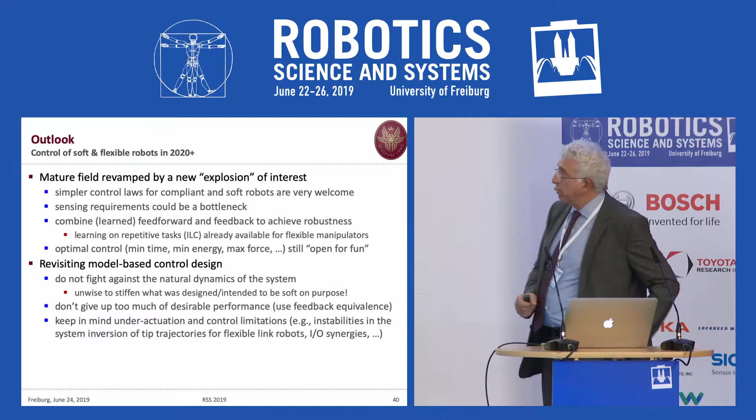Now, the other thing is revisiting model-based control design. So model-based control design is not something that you should avoid, but in fact, do not fight against the natural dynamics of the system, and this is what I commented. You never build a system and then try to remove this.

This was good in the 90s, where flexibility was a parasitic effect, and the only thing that you care about is accuracy, fast motion on track. But now that these systems are intended to share their workspace with humans, then you care about flexibility being there. But don't forget that the model is important, because with the model, you can still reach the performance that you need.

Otherwise, you would give it away and rely only on learning, which is not the best way to do, in my opinion. Also keep in mind that this last system I showed from Cosimo was fully actuated, but typically soft robots are underactuated, so not all motions are feasible.

Underactuation brings together a number of problems. One I mentioned is the inversion of tip trajectory for the flexible links. In that case, you have non-collocation, and this inversion is not feasible, so even a feed-forward computation would fail.

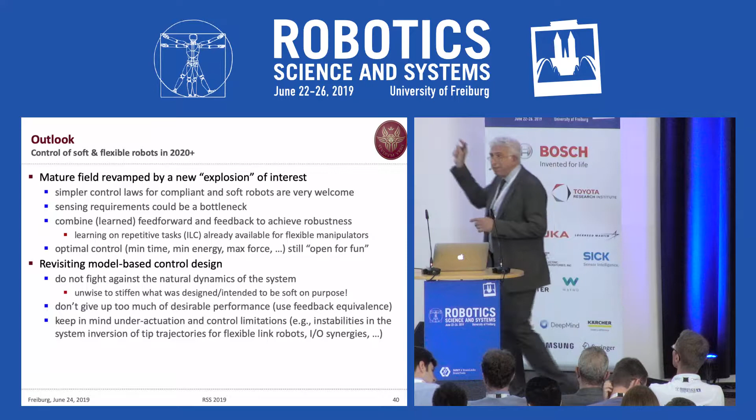So there's a word that I added in closing, which would deserve probably another lecture, which is input-output synergies.

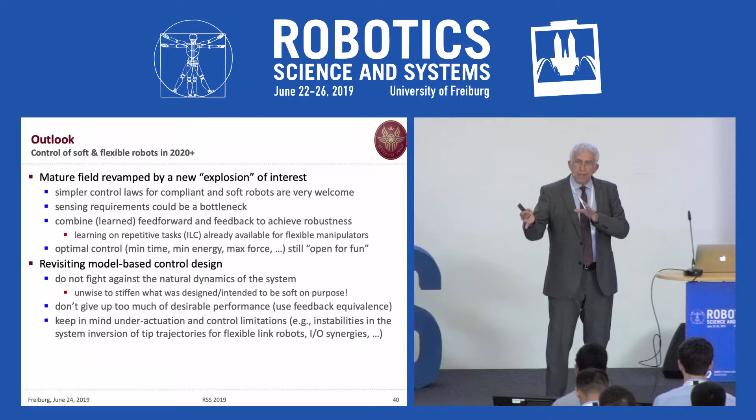In my terminology as a control guy, this would mean that even if you cannot feedback linearize these systems, because they have many degrees of freedom but only a few actuated—like the first, second, third synergy in the human hand, or in robotic hands mimicking human hands—with this limited number of commands, the best you can do is select the same number of output variables you would like to control, and then do input-output linearization if you wish, keeping in mind that the internal dynamics should remain stable.

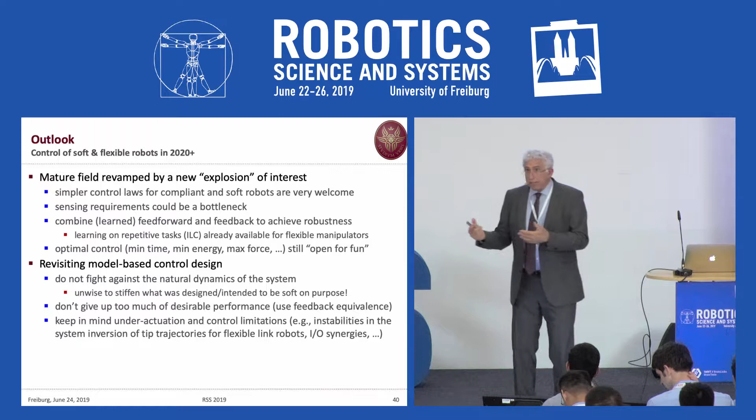Or, and this is my suggestion, even input-output feedback equivalence—without canceling things, but having the input-output behavior of the synergy in actuation and the synergy in sensing match a desired physical behavior.

And of course, there are many other classes of soft bodied robots, hands, locomotion, and so on. So these I've just scratched the surface of this problem. Thank you.